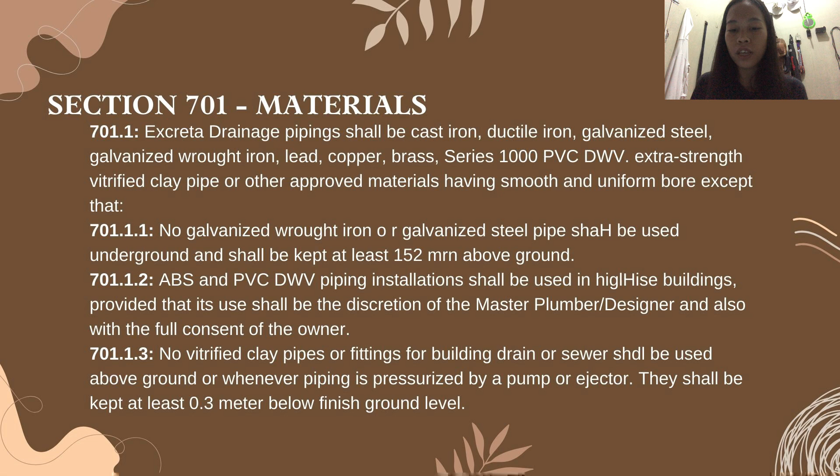No vitrified clay pipes or fittings for building drain or sewer shall be used above ground or whenever piping is pressurized by a pump or ejector. They shall be kept at least 0.3 meter below finished ground level.

Section 701.2: Drainage fittings shall be of cast iron, malleable iron, lead, brass, copper, ABS, PVC, vitrified clay, or other approved materials having a smooth interior waterway of the same diameter as the piping served, and all such fittings shall be compatible with the type of pipe used.

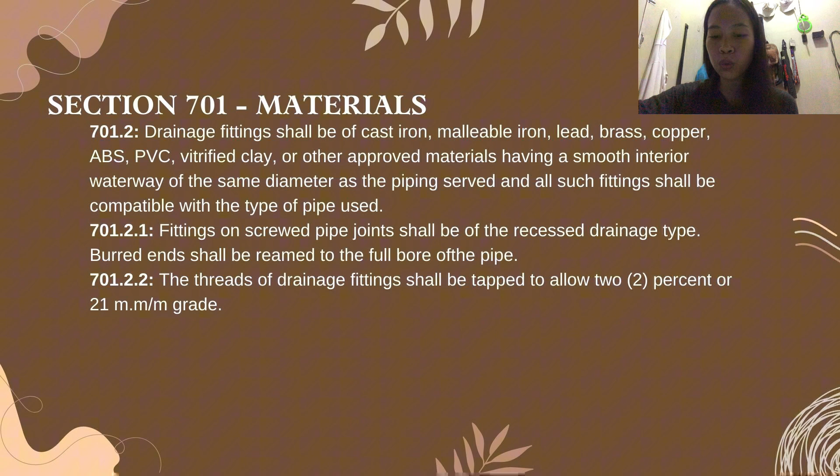701.2.1: Fittings on screwed pipe joints shall be of the recessed drainage type, burred ends shall be reamed to the full bore of the pipe. 701.2.2: The threads of drainage fittings shall be tapped to allow a 2% or 21 mm per meter grade.

Section 702, Fixture Unit Equivalent. 702.1: The fixture unit equivalent rating of plumbing fixtures shown on Table 7.2 shall be based on the size of the trap required, and the fixture unit equivalent of fixtures and devices not shown in Table 7.2 shall be based on the rated discharge capacity in liters per second in accordance with Table 7.3.

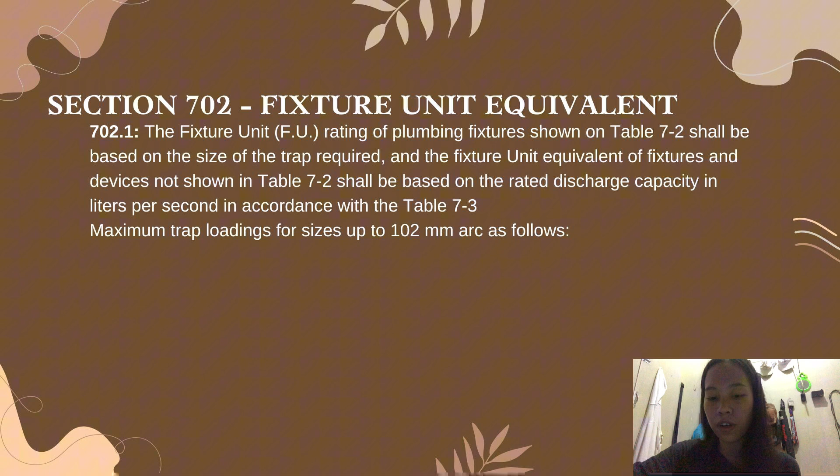The maximum trap loadings for sizes up to 102 mm are as follows, listed by item number, pipe size, and fixture unit: Item 1, pipe size 32 with fixture unit 1. Item 2, pipe size 38 with fixture unit 3. Item 3, pipe size 51 with fixture unit 4. Item 4, pipe size 76 with fixture unit 6. Item 5, pipe size 102 with fixture unit 8.

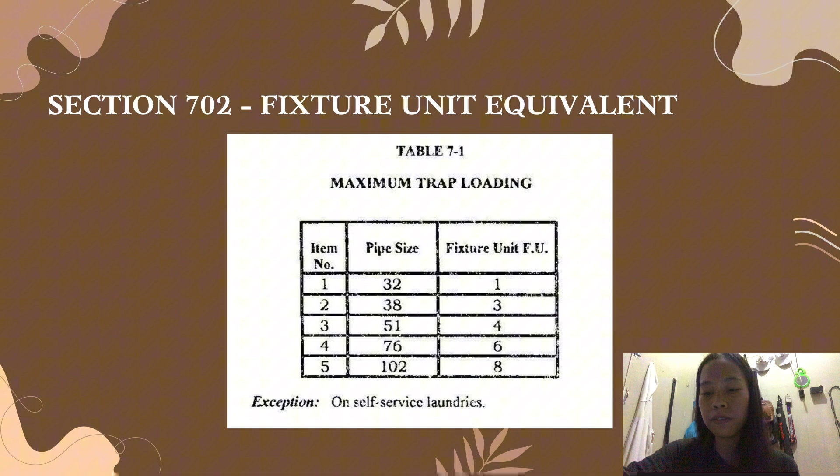Section 703, the size of drainage piping. The minimum size of vertical and/or horizontal drainage pipings shall be determined from the total of all fixture units connected thereto, and additionally in the case of vertical drainage pipes, in accordance with their height or length.

Section 703.2 and Table 7.5 show the maximum number of fixture units allowed on any vertical or horizontal drainage pipe, building drain, or building sewer of a given size; the maximum number of fixture units allowed on any branch interval of a given size; and the maximum length in meters of any vertical drainage pipe of a given size.

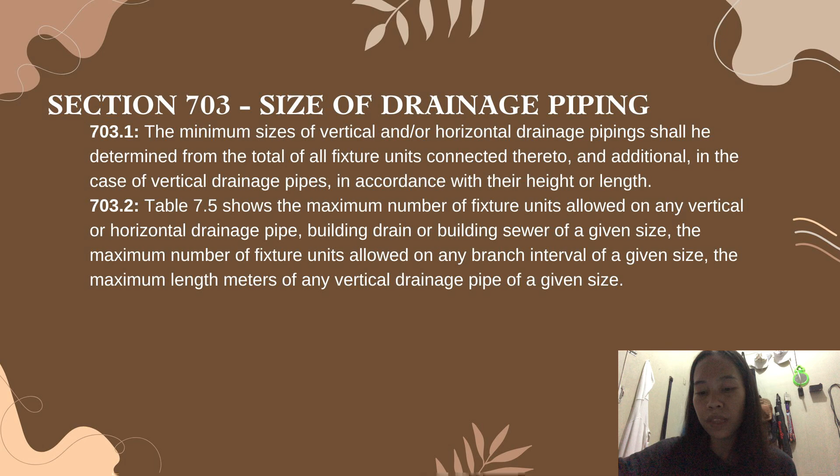In the table shown, the minimum trap diameters and drainage fixture unit values: Item 1, bathtubs, trap and trap arm size 38 mm with 2 drainage fixture units. Bidet, 38 mm trap and arm size with 2 drainage fixture units. Clothes washers, 51 mm with 2 drainage fixture units.

Dental units or cuspidors, 32 mm with 1 fixture unit. Drinking fountains, 31 mm with 1 drainage fixture unit. Floor drains, 51 mm with 2 fixture units. Interceptors for grease, oil, etc., 51 mm with 3 fixture units.

Laundry tubs, 38 mm with 2 fixture units. Interceptors for sand, auto wash, etc., 76 mm with 6 fixture units. Mobile home park traps, one for each trailer, 76 mm with 6 fixture units.

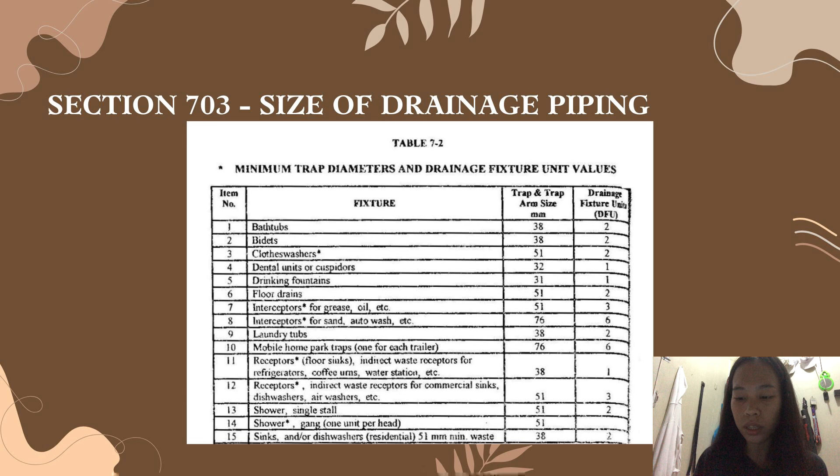For sinks, bar, commercial, 51 mm min. waste, we have 38 mm with 2 drainage fixture units. Next is the sink, bar, and private 38 mm min. waste. We have 38 mm with 1 fixture unit.

Sinks, commercial or industrial, schools, etc., including dishwashers, wash-up sinks, and wash fountains, 50.8 mm waste. We have 38 mm with 3 drainage fixture units.

For sink, flushing rim, for clinic, we have 76 mm and 6 drainage fixture unit. For sink service, we have 51 mm with 3 drainage fixture unit.

For urinal, pedestal trap arm only, we have 76 mm with 6 fixture unit. For urinal stall separate trap, we have 51 mm with 2 drainage fixture unit.

For urinal wall mounted integral trap arm only, we have 51 mm with 3 fixture unit. For urinal wall mounted and blowout integral trap arm only, we have 76 mm with 6 drainage fixture unit.

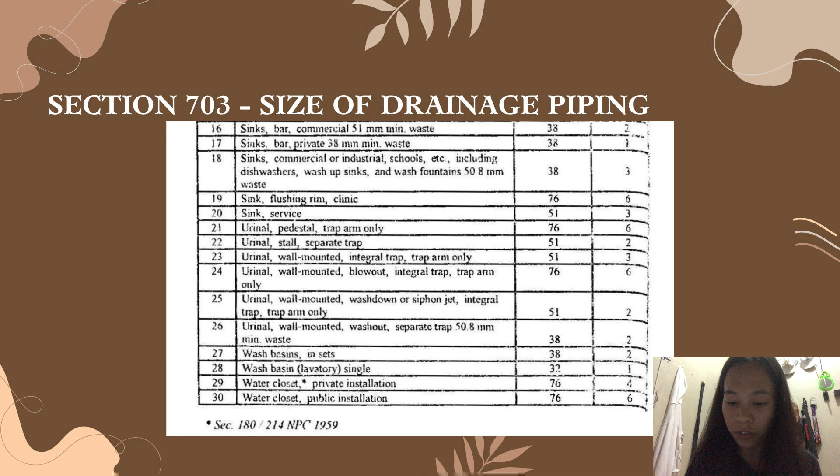So for size of drainage piping, note that the size and discharge rating of each indirect waste receptor and each interceptor shall be based on the total rated discharge capacity of all fixtures, equipment, or appliances discharging thereinto, in accordance with Table 7.3. Drainage piping serving batteries or appliances capable of producing continuous flows shall be adequately sized to provide for peak loads.

So the clothes washers in groups of 3 or more shall be rated at 6 fixture units each for the common horizontal and vertical waste pipe sizing.

For water closets, it shall be computed as 6 fixture units when determining septic tank size based on Appendix B of this code.

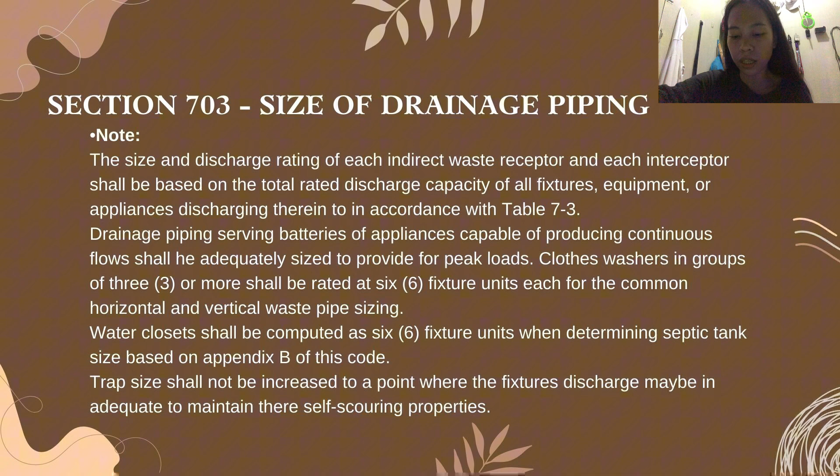And for the trap size, it shall not be increased to a point where the fixture discharge may be inadequate to maintain their self-scouring properties. For the discharge capacity, we will express it as liters per second for intermittent flow only.

So for item number 1, we have up to 0.47 liter per second with 1 fixture unit. For item number 2, we have 0.50 to 0.95 liters per second with 2 fixture units.

For item number 3, we have 1 to 1.89 liters per second and 4 fixture units. For item number 4, we have 1.95 to 3.15 liters per second with 6 fixture units. So the capacity over 3.15 liters per second shall be determined by the administrative authority.

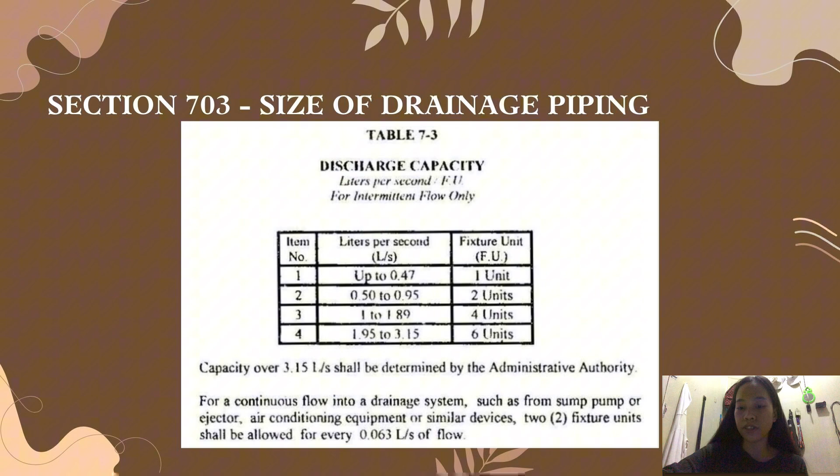For a continuous flow into a drainage system such as from sump, pump, or ejector, air conditioning equipment, or similar devices, 2 fixture units shall be allowed for every 0.063 liter per second of flow.

So let's proceed to section 704, the fixture connection to drainage. Section 704.1, the drainage piping shall be provided with approved inlet fittings for fixture connections correctly located according to the size and type of fixture proposed to be connected.

For 704.2, two fixtures set back to back or side by side within the distance allowed between a trap and its vent may be served by a single vertical drainage pipe, provided that each fixture waste separately into an approved double fitting, such as double sanitary T or double Y and 1/8 bend, having inlet openings at the same level.

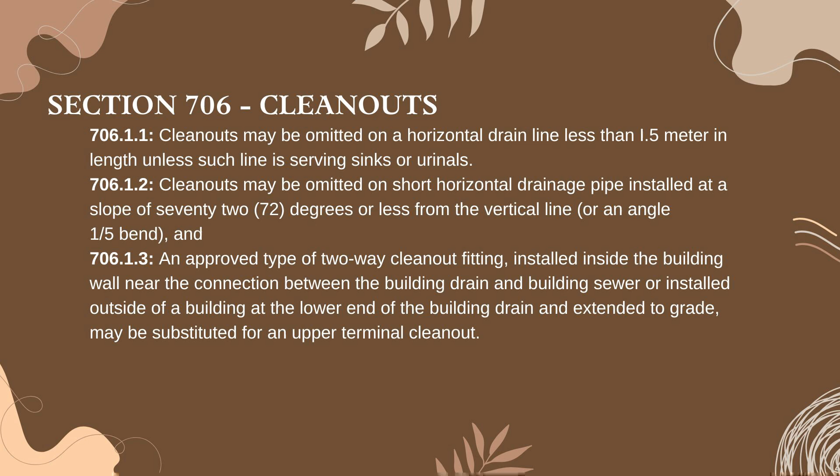Section 708, Gravity drainage required. Where practicable, all plumbing fixtures shall be drained into the public sewer or private sewage disposal system by gravity.

Next, Section 709, Drainage of fixtures located below the upstream manhole or below the main sewer level. Drainage piping serving fixtures which have flood level rims located below the elevation of the nearby upstream manhole invert of the public sewer serving such drainage piping shall be protected from backflow of sewage by installing an approved type backwater valve. Fixtures installed above such elevation shall not discharge through the backwater valve.

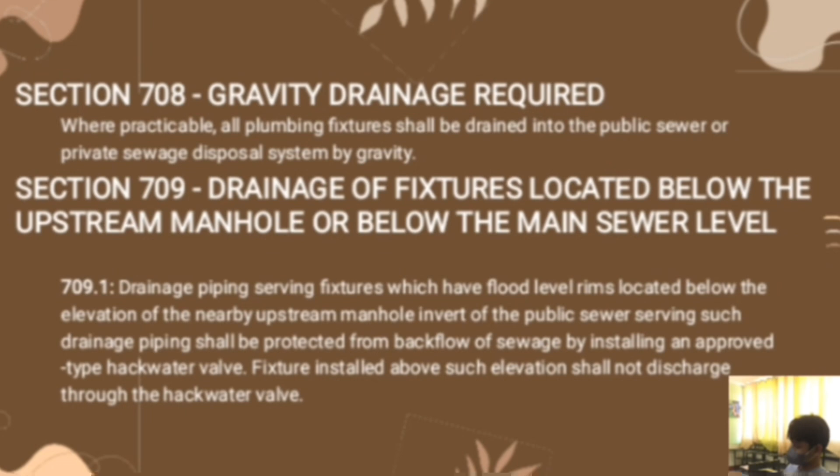Drainage piping serving fixtures located below the crown level of the main sewer shall be discharged into an approved watertight sump or receiving tank. The sewage or other liquid waste shall then be lifted and discharged into the building drain or building sewer by approved ejector, pump, or other equally efficient mechanical device.

The minimum size of any pump discharge or any discharge pipe from a sump having a water closet connected thereto shall not be less than 50.8 mm diameter.

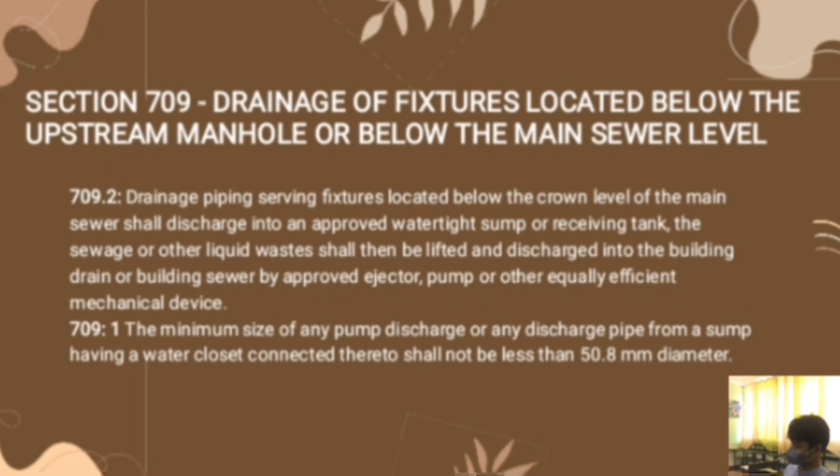The vertical discharge line from such ejector, pump, or other mechanical device to horizontal drain line shall be provided with an accessible backwater or swing check valve and a gate valve close to the connection with the horizontal line. The method of connection shall be at the top of the horizontal line through a wye branch fitting. The gate valve shall be located at the discharge side of the backwater or check valve.

Building drain or building sewer receiving discharge from any pump or ejector shall be of adequate size to prevent overloading. Two fixture units shall be allowed for each 0.063 liter per second of flow, or each GPM flow.

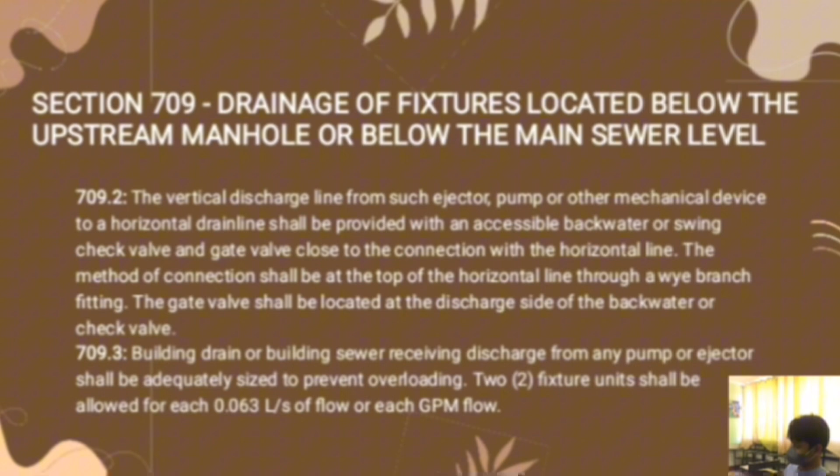Backwater valves, gate valves, motors, compressors, air tanks, and other mechanical devices required by this section shall be located where they will be accessible for inspection and repair at all times, and when not exposed, shall be enclosed in a watertight masonry pit fitted with an adequate size removable cover. The drainage and venting system in connection with the fixture, sump, receiving tanks, and mechanical waste lifting device shall be installed under the same requirements as provided in this code for gravity systems.

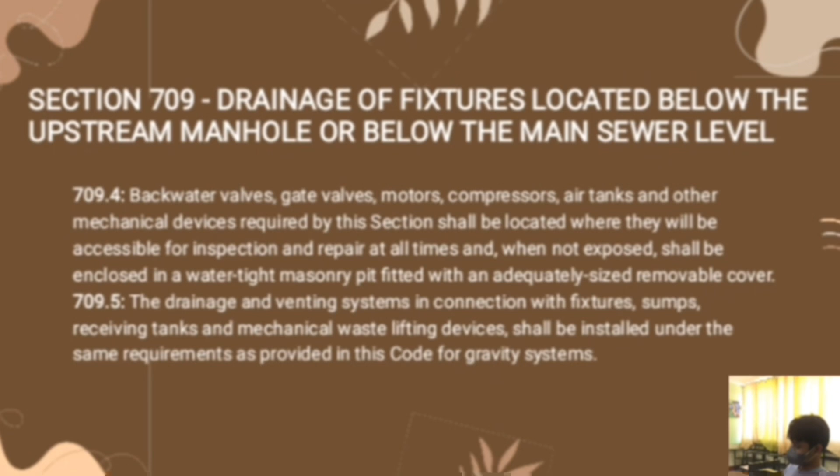Sump and receiving tanks shall be watertight and shall be constructed of concrete, metal, or other approved materials. If constructed of poured concrete, the walls and the bottom shall be adequately reinforced and designed according to recognized acceptable standards. Metal sumps or tanks shall be of such thickness as to serve their intended purpose and shall be properly coated internally and externally to resist corrosion.

All such sumps and receiving tanks shall be automatically discharged, and when rated as public use occupancy, shall be provided with dual pumps or ejectors arranged to function independently in case of overload or mechanical failure. The invert of the lowest inlet to the tank shall have a minimum distance of 51 mm above the high water or starting level of the pumping operation.

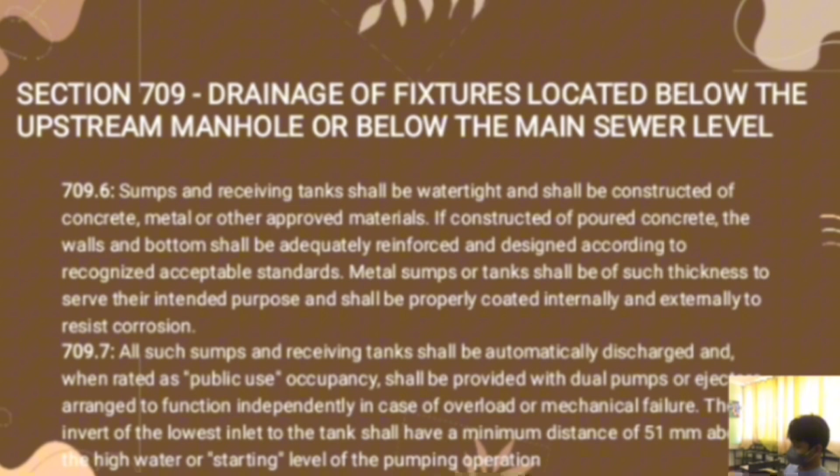Sump and receiving tanks shall be provided with substantial covers having a bolt and gasket type manhole or equivalent opening to permit access for inspections, repairs, and cleaning. The top shall be provided with a vent pipe which shall extend separately through the roof, or when permitted, may be combined with other vent pipes.

Such vents shall be large enough to maintain atmospheric pressure within the sump under all normal operating conditions, and in no case shall be less in size than required by Table 1-5 for the number and type of fixtures discharged into the sump, nor less than 51 mm in diameter.

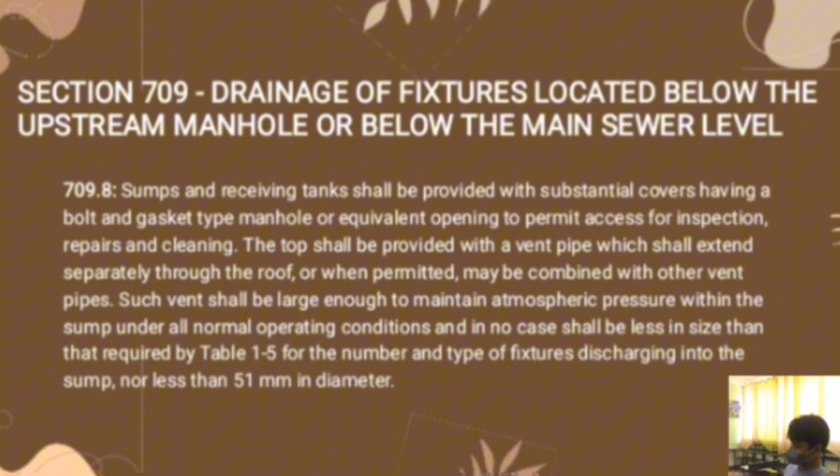Air tanks shall be proportioned to be of equal cubical capacity to the ejector connected therewith, where there shall be maintained an air pressure of not less than 3 kg for each meter of height the sewage is raised. No water-operated ejector shall be permitted.

When a subsoil drainage system is installed, it shall be initially discharged into an approved receiving tank and discharged in a manner satisfactory to the administrative authority.

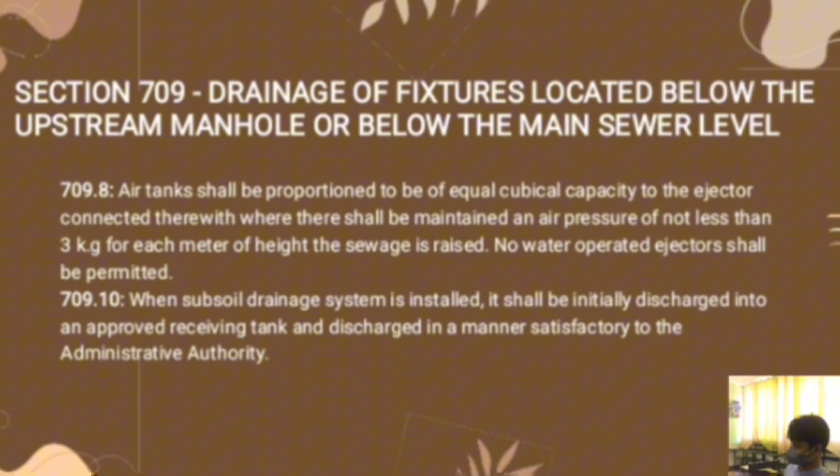Section 710: Suds relief. Fixture outlets shall not be connected to the horizontal excreta drainage piping system within 2.4 meters of any vertical-to-horizontal change of direction of a stack containing such suds-producing fixtures. Bathtubs, laundries, washing machines, standpipes, kitchen sinks, and dishwashers shall be considered such suds-producing fixtures.

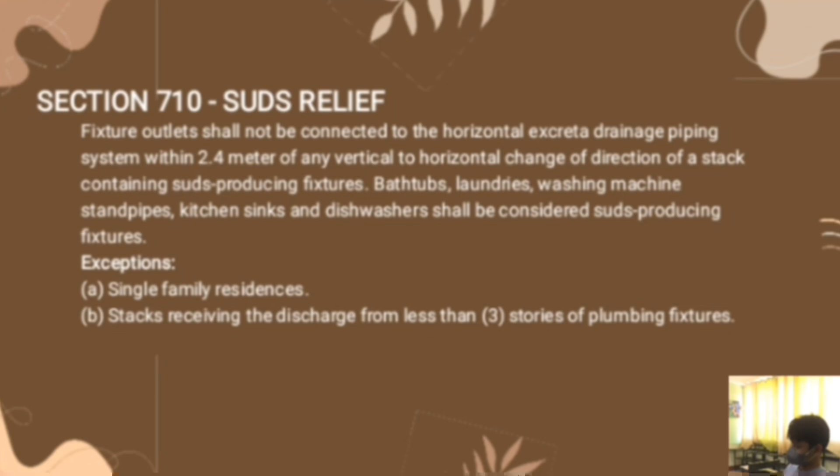Exception: single-family residences, stacks receiving the discharge from less than 3 stories of plumbing fixtures.

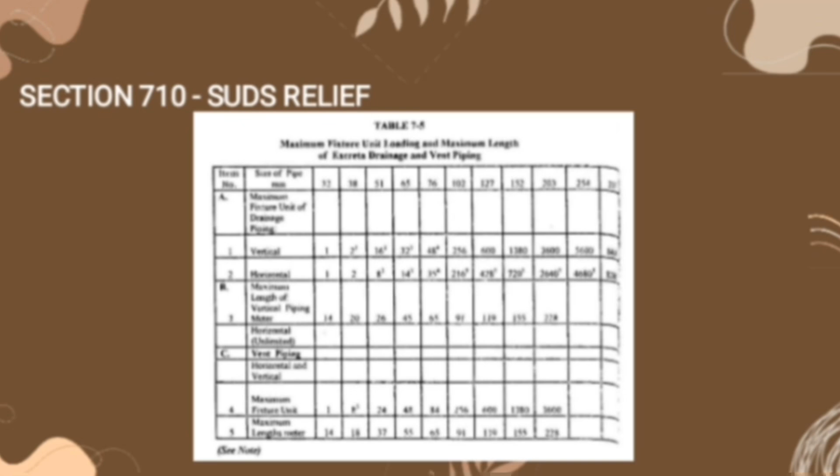Suds relief table, this is the sample of the suds relief table. First, excluding trap arm. Second, except sinks, urinals, and dishwashers. Third, except 6 fixture unit traps or water closets. Fourth, only 4 water closets or 6 fixture unit traps are allowed on any vertical pipe or stack, and not exceeding 3 water closets or 6 fixture unit traps on any horizontal branch or drain.

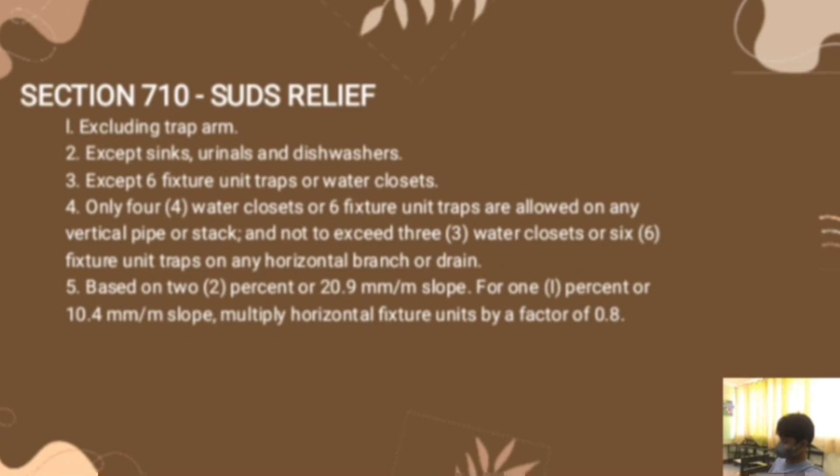Fifth, based on 2%, or 20.9 mm per meter slope. For 1%, or 10.4 mm per meter slope, multiply horizontal fixture units by a factor of 0.8. Note: the diameter of an individual vent shall not be less than 32 mm, nor less in size than one-half the diameter of the drain to which it is connected.

Fixture unit load values for drainage and vent piping shall be computed from tables 7-2 and 7-3, not to exceed 1/3 of the total permitted length. Any vent may be installed in a horizontal position when vents are increased one pipe size for their entire length. The maximum length limitations specified in this table do not apply.